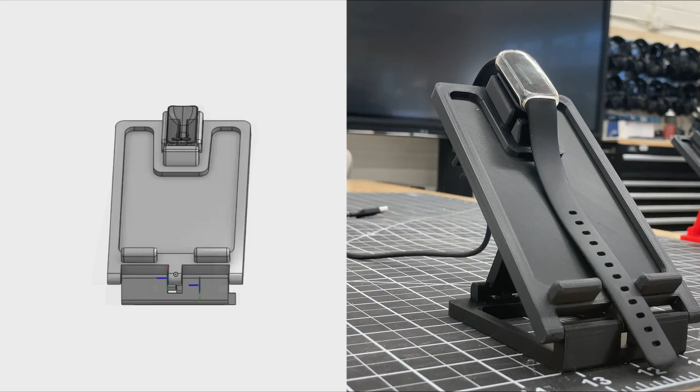I will be starting off this presentation by showing our initial thought process behind this product, and also our initial design process. My team partner will later show the manufacturing process, display how to use 3D printing technology, and some of the difficulties we encountered when turning our design into reality.

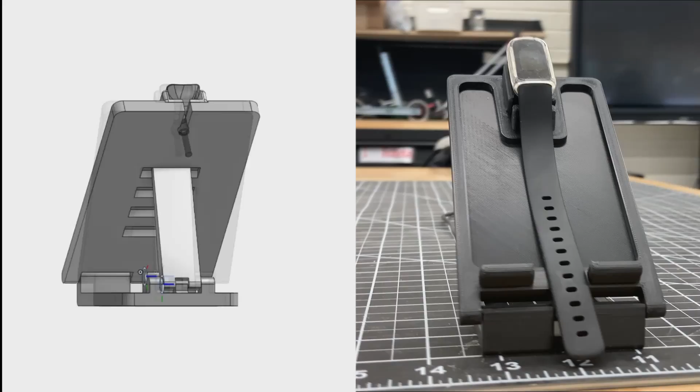Let me explain our initial thought process behind this product. I had recently purchased a Fitbit Luxe smartwatch to track my workouts, and this is the charger it came with. I quickly noticed a big problem with the charger: when charging, it holds onto the smartwatch via magnets inside the charger, but these magnets are sometimes not strong enough to keep it charging. I had almost lost the smartwatch many times because of this. The charger could not stand up by itself, so the smartwatch had to be laid on its side when charging, making it even easier to lose or damage by accident.

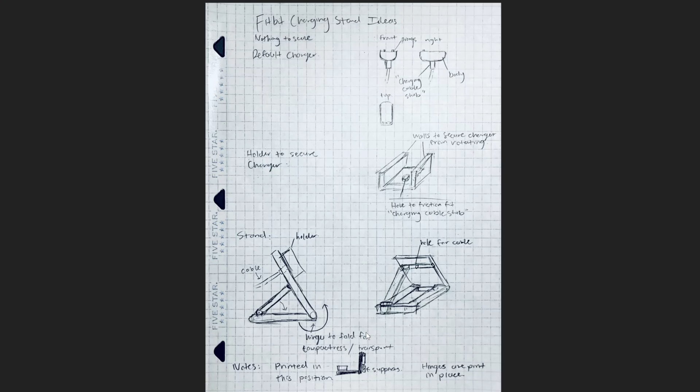I began thinking about how to fix this problem by making quick sketches of possible solutions on graph paper. Here you can see I modeled the charger itself, then a holder, and a stand for it so I could charge the smartwatch standing up. I also thought about 3D printing the design as an all-in-one assembly, so anyone could take it off the printer, remove some supports, and immediately use it. However, we ditched that setup in favor of printing the product in 3 separate parts, as it yielded much cleaner results, and assembling the parts together in the end is super easy and very satisfying.

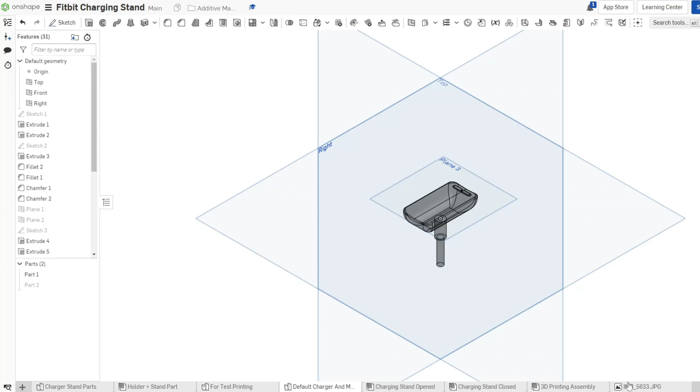Moving on to the CAD, I modeled the product in Onshape, a web-based CAD software, because I only had a Chromebook and a mouse at the time. The first thing I did was turn the actual charger into a 3D model by taking dimensions with calipers and using photos, such as this one, as references.

I then designed a holder around the model of the charger so I could lock the charger in place. I used a friction fit hole and put the wire through it to keep the charger in the holder, and added walls on the sides of the charger to prevent it from rotating.

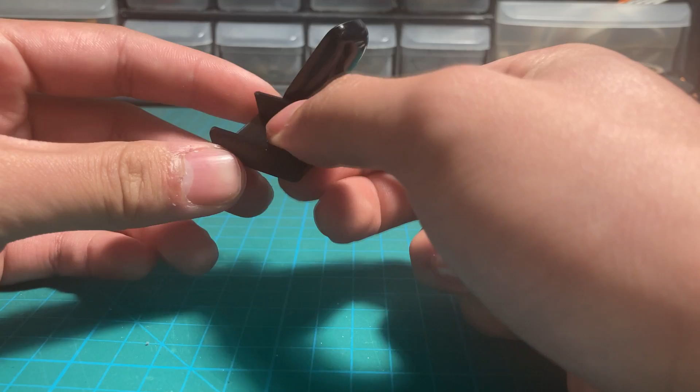After designing the holder, I immediately printed it out on my 3D printer to see if the Fitbit charger would actually fit. I threaded the wires through the slot and stuck it through the hole. The holder held the charger perfectly.

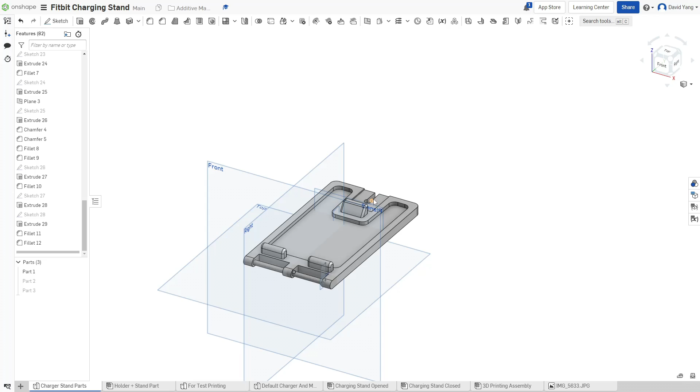After that success, I returned to Onshape to model the stand. I started by extruding a basic rectangular block, then added a slot for the holder and a hole for the wire. Later on, I would make the holder and this part in an assembly and print both out as one part.

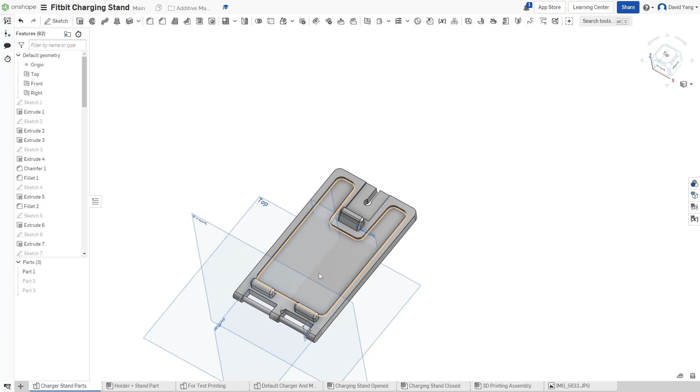I then added a block here for aesthetics purposes and to help support the smartwatch when it is charging. I hollowed out a large part of the original extrusion to save material and weight. After that, I added a rod structure for the other parts to hinge off of, as you will see later.

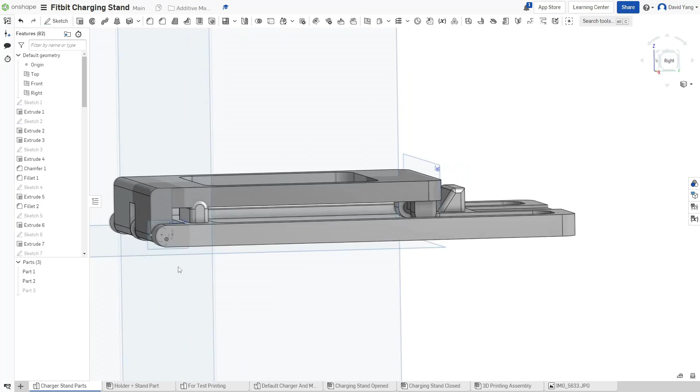I then started designing the base of the stand, attaching it to the other part by giving it a circular slot to snap into the rod structure as mentioned previously. The simple hinge structure would be easy to print on a 3D printing CNC and is cool to assemble together after printing.

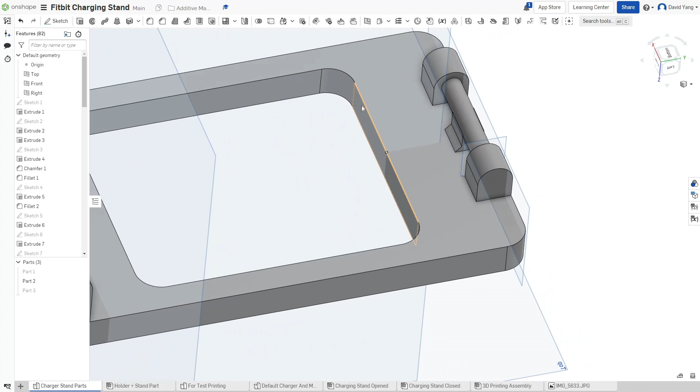Here you can see I modeled a similar rod structure in the back of the base plate for the hinging stand that I will model later. I cut the middle portion out of the base to save weight and material as well, making sure to put fillets everywhere for aesthetics and to give the product a good feel.

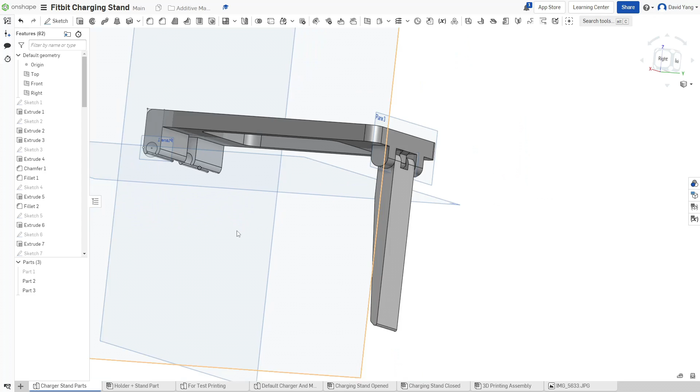Finally, I modeled the last part to hold everything together. I made it simple and easy, giving it a slanted shape so it could fit easily inside the grooves I modeled earlier on the back of the first part.

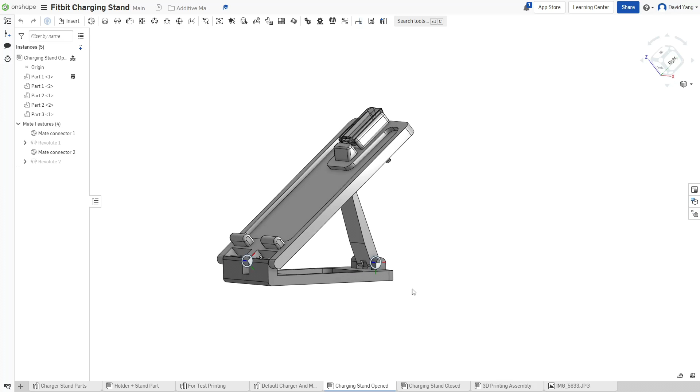After all that, I imported the parts into an assembly and mated them together properly to check for fit and style. In one assembly I had the stand open, and in another I had it in its folded or closed position. I was really happy and satisfied with this look, so it was time to take the model to the slicing software for 3D printing.

Just a quick thing to note as well, these tabs here were actually designed later, after printing out the first prototype. They give the stand another great function, and that is to hold any smartphone in its vertical or horizontal position.

To set up the slicer settings, first we chose 0.15mm for the print layer height, since our design did not need to be very detailed. We selected overture filament, which is what we're printing our design with. We added supports because our design had bridging features, and we used 25% infill since it won't undergo much force, which also saves on printing cost and time.

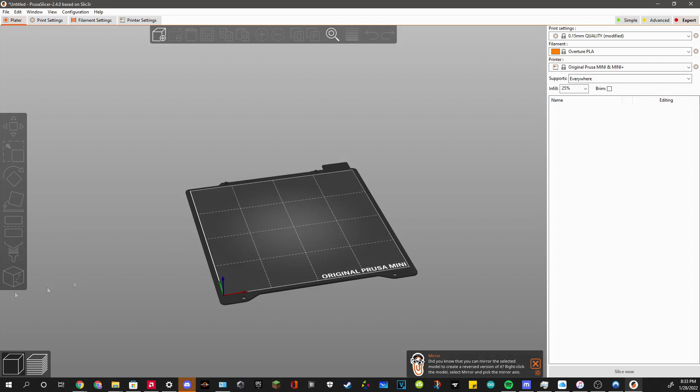After we sliced the model and exported its G-code, we are ready to put it into a USB drive and take it to the 3D printer for printing.

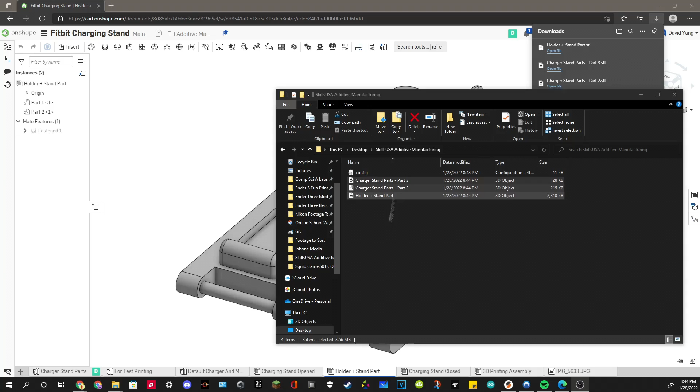This quick portion of the video is a sped up screen recording of me exporting all the parts of the design as STLs and then importing them into the slicing software. Here I am properly orientating the parts for printing and spreading them out on the printing bed so the 3D printer can print them properly.

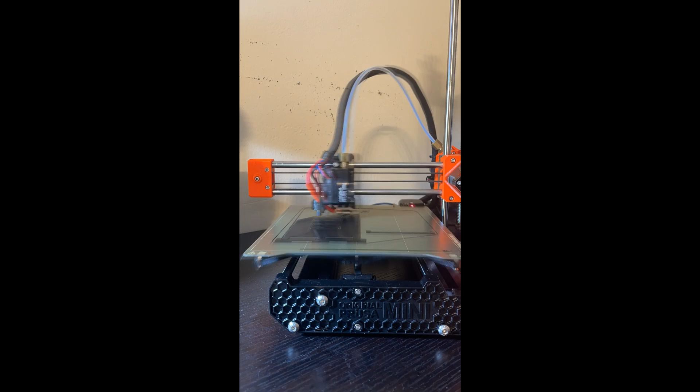Here is a quick time lapse of the first layer being printed on the 3D printer. As you can see, everything turns out great and the print settings are spot on.

After the printing is finished, we take off the support structure, and after that is done, the parts are ready to be assembled and tested.

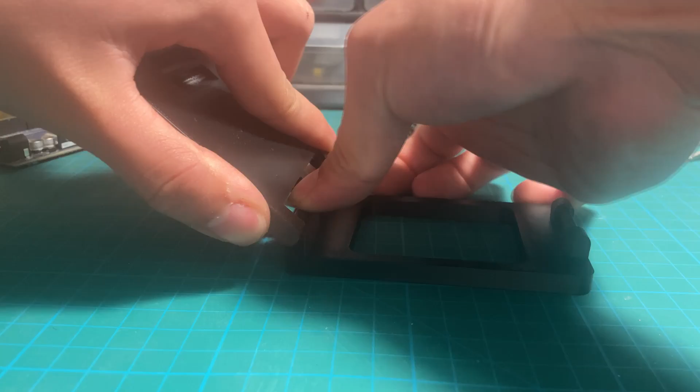The assembly is pretty simple and straightforward. The two hinges just have to be clipped together. The product works amazingly as both a Fitbit charging stand and as a phone stand.